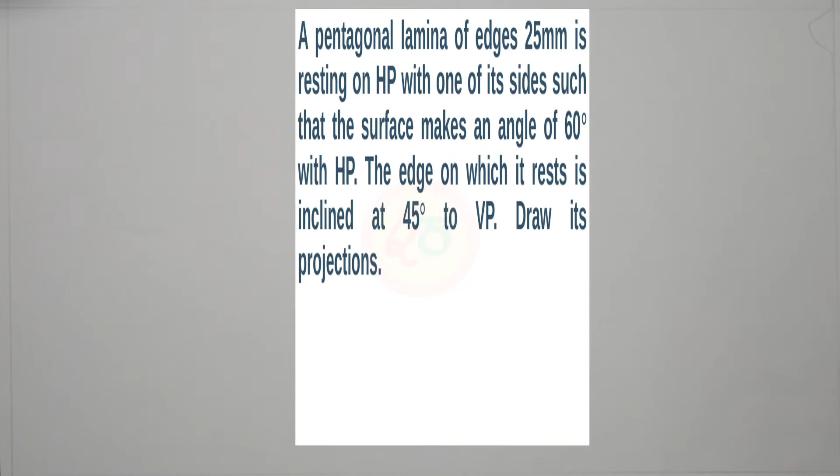Henceforth, when we take up a pentagon or a hexagon, whenever we mention it as a regular pentagon or a regular hexagon or just as a pentagon by giving only one dimension, it is assumed that the rest of the edges are also of the same dimension.

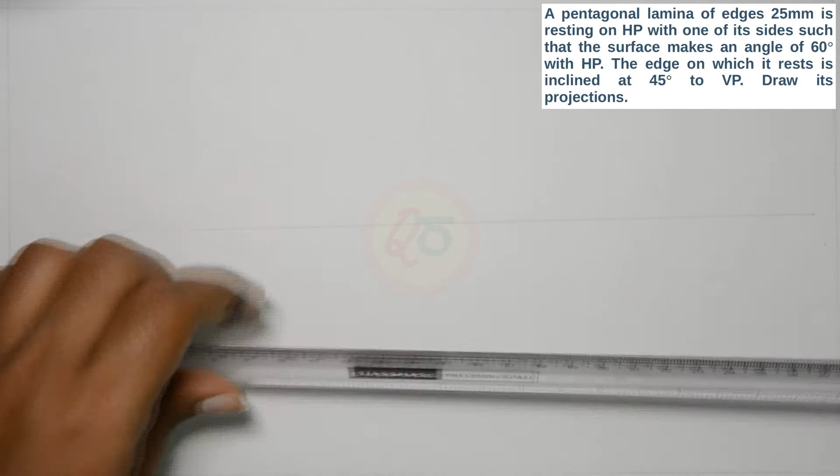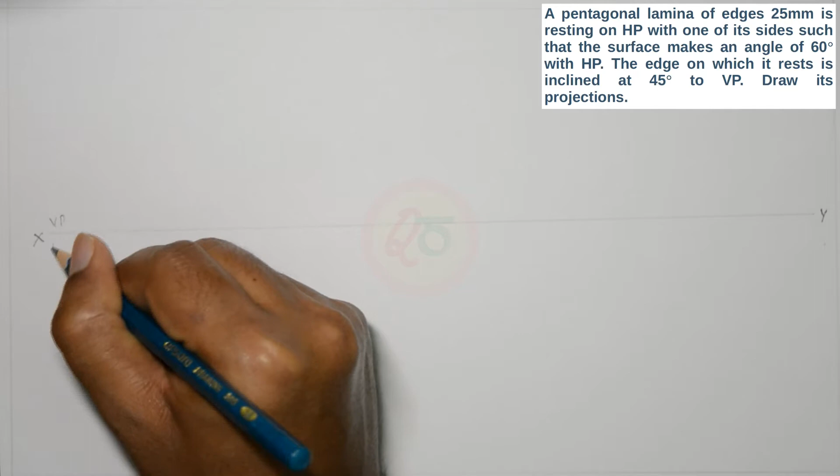Okay, so the very first thing that needs to be done is drawing an XY line. Use your HB pencil, draw an XY line. Okay, name it using a 2B pencil. So X, this end is Y, the space below XY is HP. So the space above is VP.

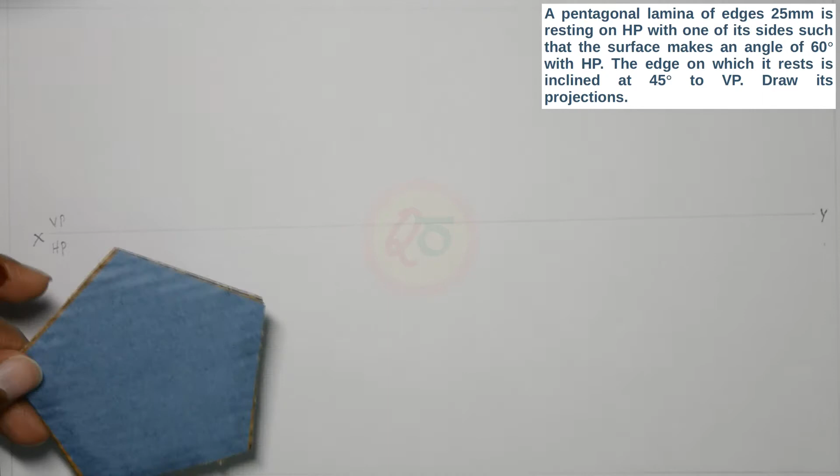Since we are dealing with first angle of projection, the very next thing is we need to look for where the pentagonal lamina rests. The problem statement says that it rests on HP on one of its edges. So the assumed pentagon should lie in such a way that one of the edges should be perpendicular to XY line, thereby meaning that it is perpendicular to the VP plane.

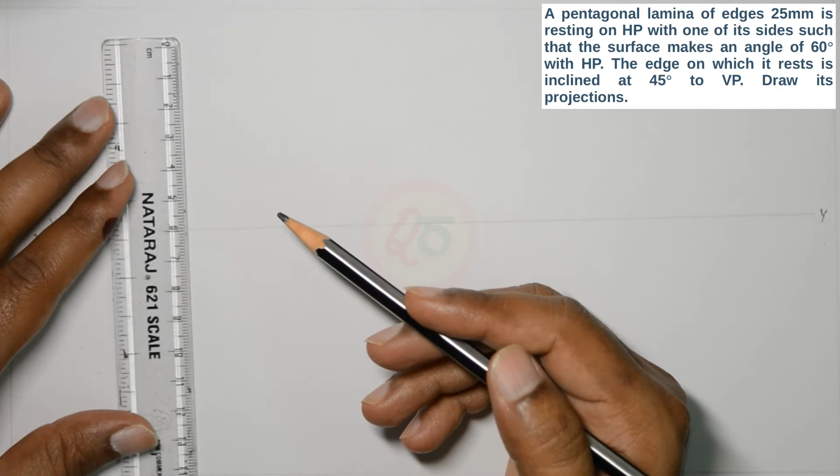And in the first position, we'll make the entire pentagon rest on HP with an edge taken onto the right side. So how do we construct this? There are different methods if you Google them. The simple method that I follow, and which I feel is more convenient, is to initially draw the resting edge, say 1.5 centimeters or 15 mm below the XY line. I'll take 1 centimeter below. Okay, and this should be for the edge length. Edge length is 25 mm.

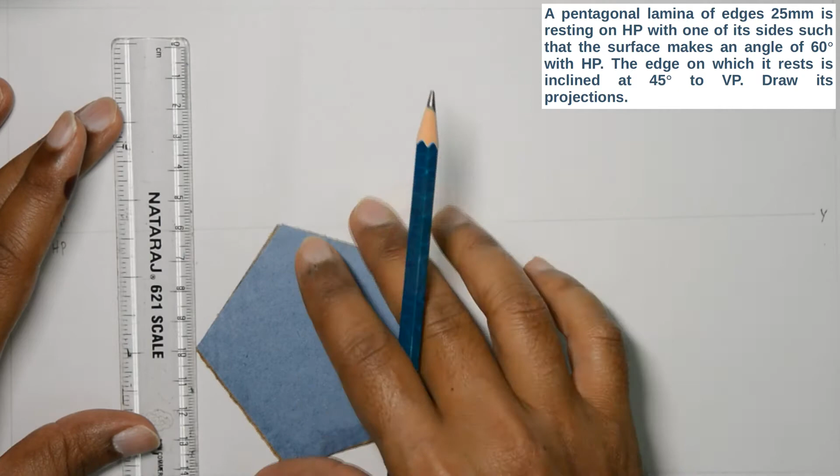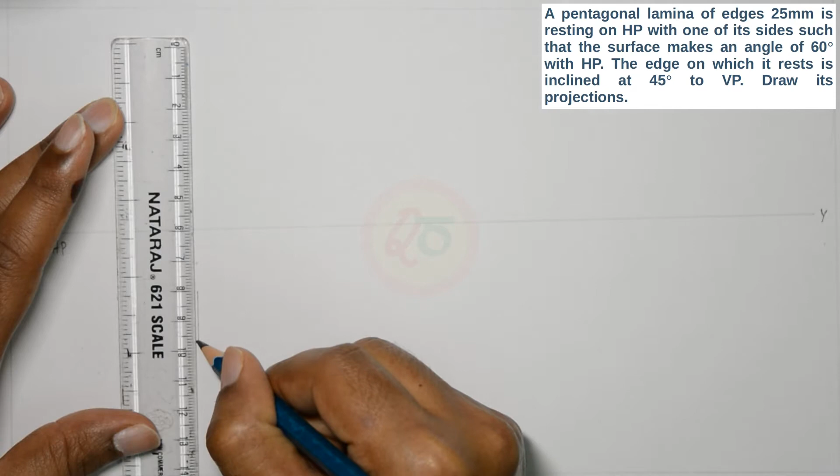Okay, so 25 mm line, you can use your 2B pencil directly, but see, if I draw from 10 mm from XY line, if you consider this as the resting edge, the other corner is going to reach the XY line. So the best way is, I would suggest that you start say 1.5 or 2 centimeters below the XY line. So I go with 2 centimeters. So from 2 centimeters below the XY line, 25 mm, let me draw the edge of the pentagon.

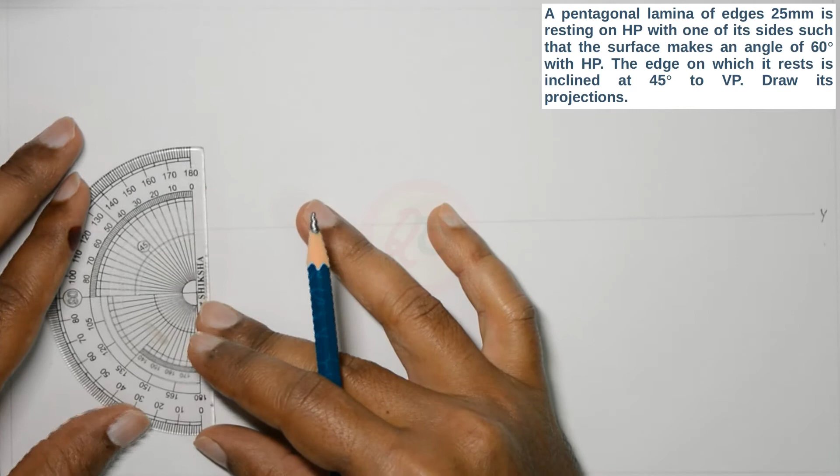Okay, so once you have drawn this, if you consider this to be the resting edge, this angle is 108 degrees, or the other angle is 72 degrees. So this is the general angle for a regular pentagon. So what next is, use your protractor and mark 108 degrees or 72 degrees from the other side on either ends. So from this point, I'm going to measure the angle 72 degrees in this direction, let's say 72.

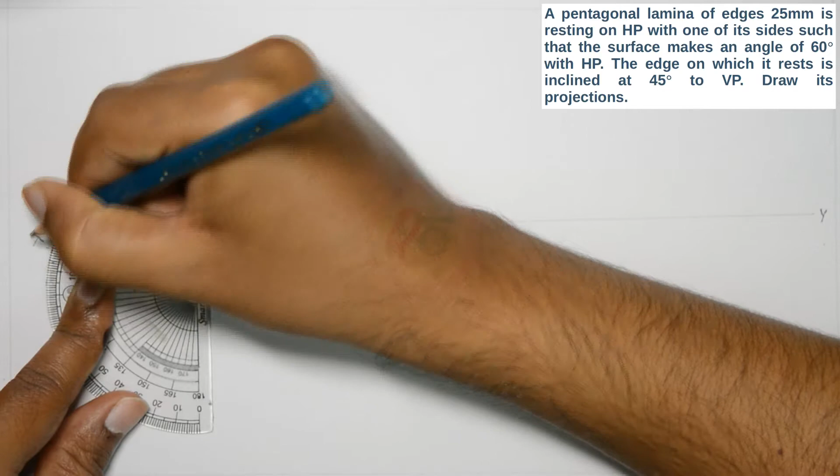Similarly, from the other end, let us mark 72, 72. It's right here. Okay. Once you have marked those 72 degrees with your 2H pencil, connect the 72-degree marking with a very faint line on both ends.

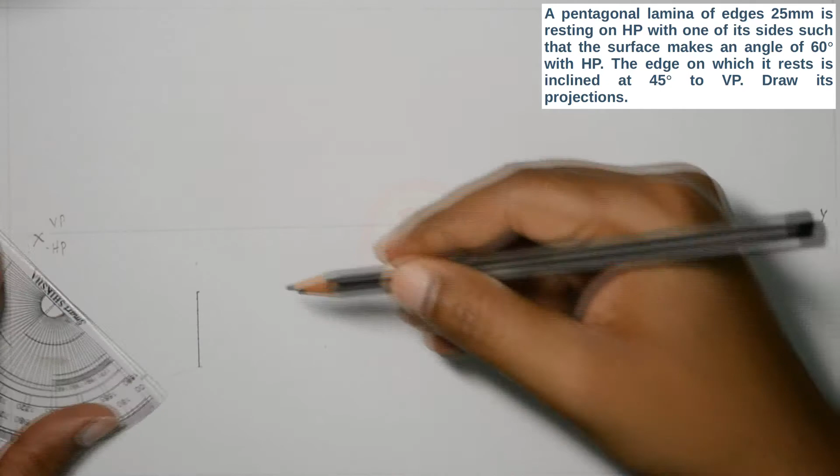Now, using your compass, this is 25 mm, right? All the sides of the pentagon are of 25 mm. We are considering a regular pentagon. Measure 25 mm. Cut an arc on the 72-degree angular line that you have drawn from both the corners of the edge.

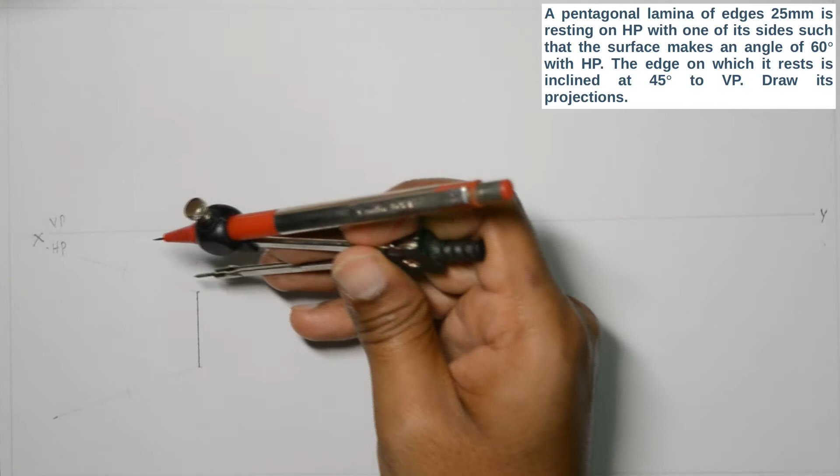And once you have done this, from the intersection point of the arc and the 72-degree line, draw an arc somewhere close to the middle point of the edge that was earlier drawn. So if I draw a line from the midpoint, it should somewhere be on the arc. Similarly, from the other intersection point also cut an arc. Okay, so the intersection point will give you the 5th corner.

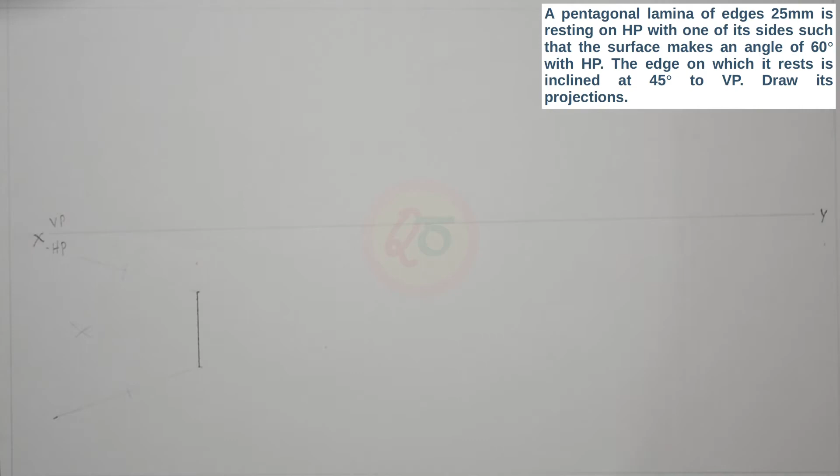Now with a 2B pencil, connect these corners. Okay, similarly from this corner to the last corner that we created, from here and finally, okay.

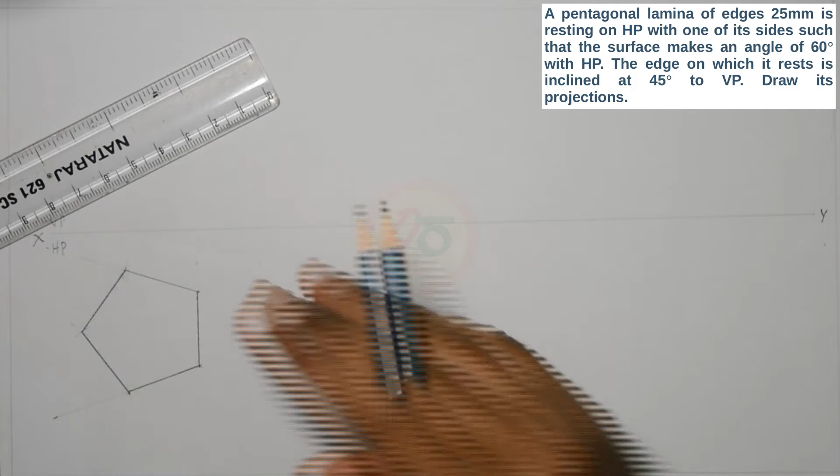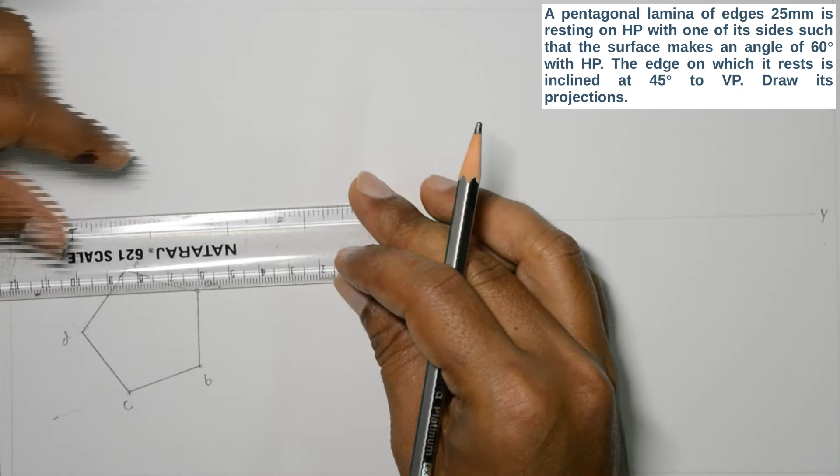Now how do you name this? Naming will follow the same procedure, where this is A, B, C, D and E. Okay. Now with a 2H pencil, dimension the edge. Any edge you can use to represent the dimensions.

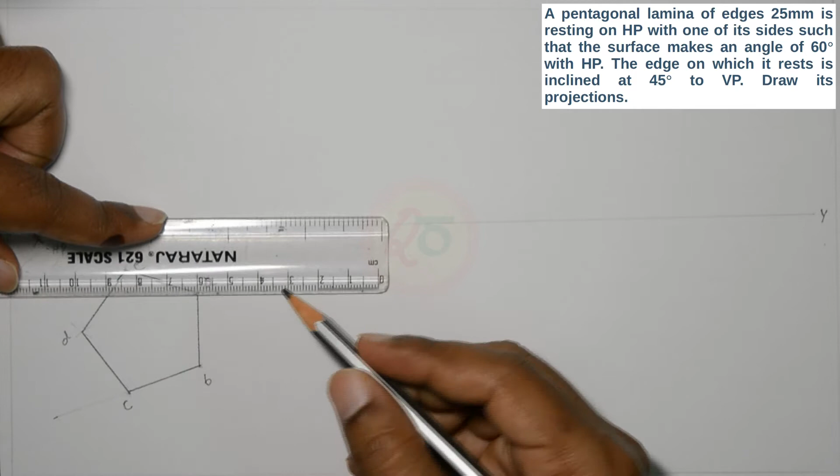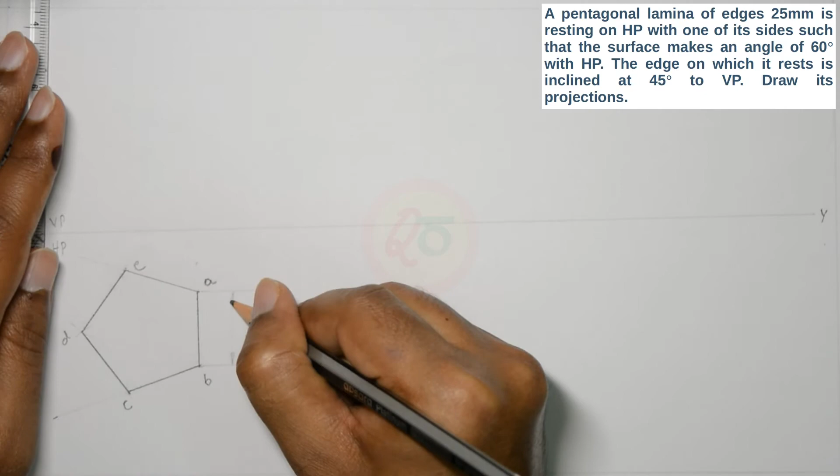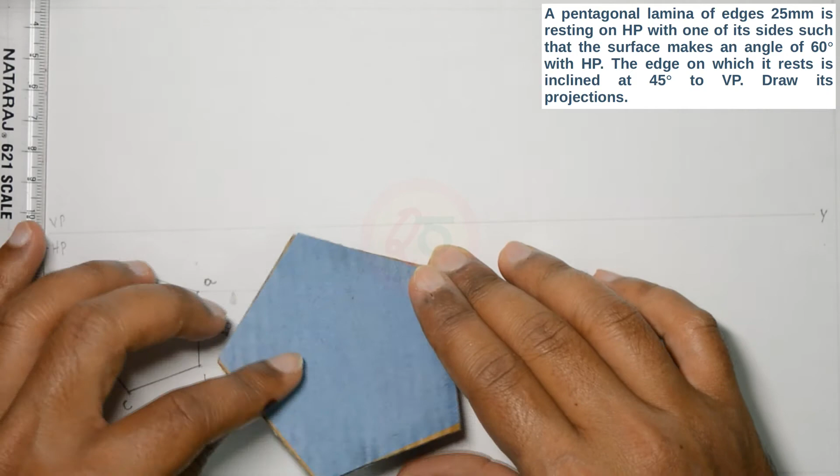Filled arrow marks. So this is 25. Now, since it is entirely resting on HP, when you see it in the front view and project it onto the VP, it will be seen as a single line. So take the projections from all the points.

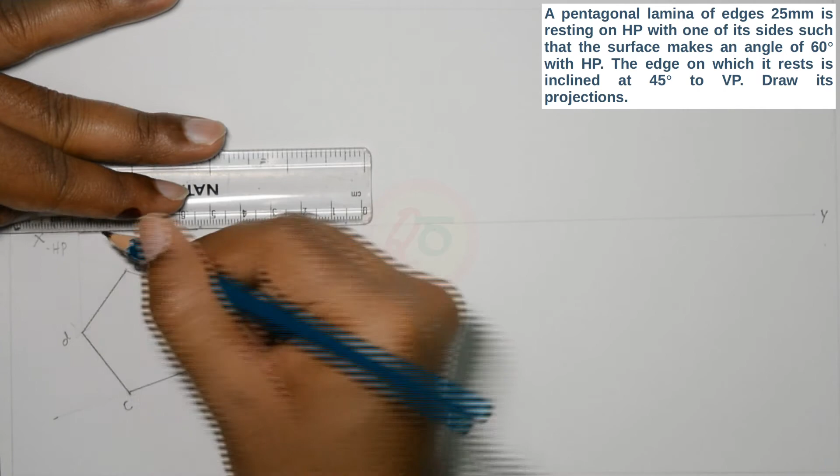See, one more thing, C and E will lie on the same line, okay? A and B will also lie on the same projection line. So darken the segment on the XY line from the extreme projection lines. Between the extreme projection lines, the XY line needs to be darkened. Name them.

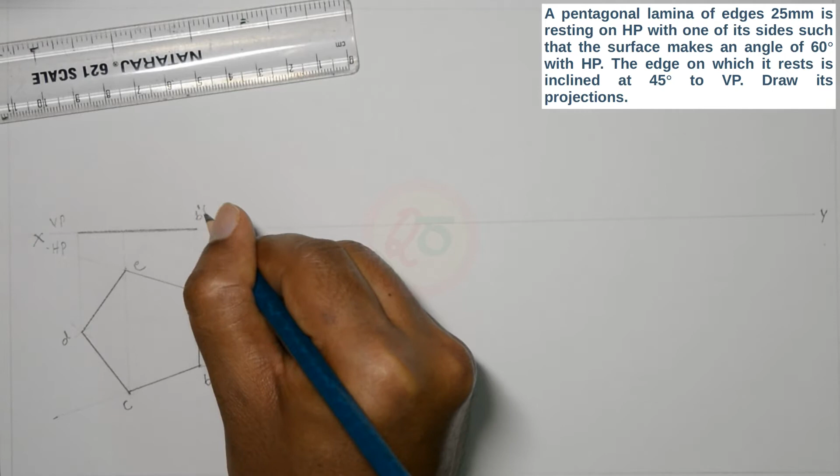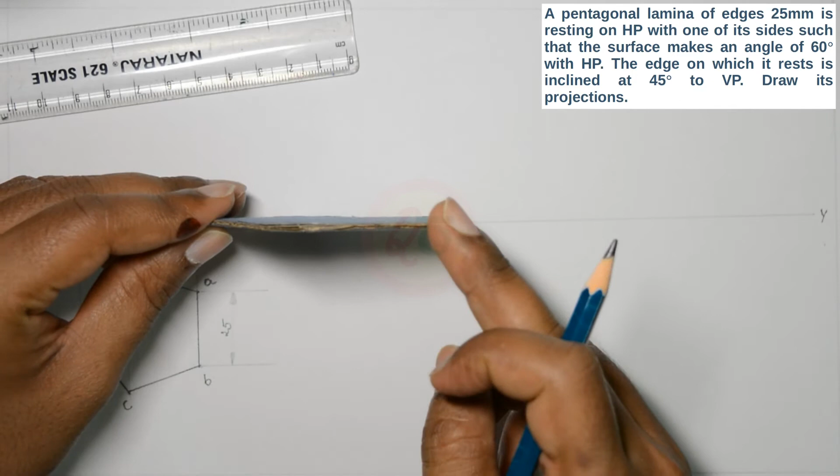So B is visible, so B dash without brackets, A dash with brackets. C dash is visible, so without brackets. E dash is not visible. So if you view it in this direction, B is visible but A is not visible. Similarly, C is visible but E is not visible. So this is D dash. Okay.

Now the next condition is we need to look for the inclination with respect to the resting plane. So the inclination with respect to resting plane is it makes an angle of 60 degrees with HP. So this pentagon, which is like this in the first position, the edge will rest on HP and the entire lamina is going to lift from the opposite corner to the resting edge, and by lifting the entire lamina, the angle to the HP plane, this angle which gets created, will be equal to 60 degrees.

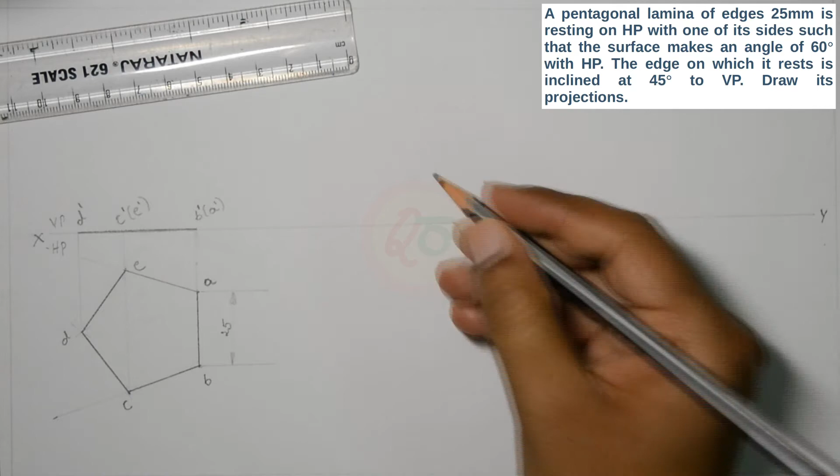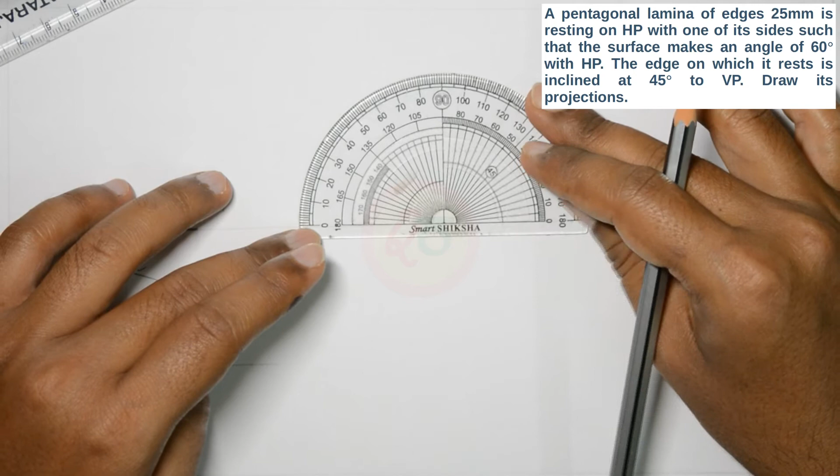So in order to achieve that, select a random point, and again when the entire lamina lifts like this, the projected length, see, suppose this is the front view, assuming this is an HP plane, when a 60 degree angle is obtained, the projected length of the lamina will not change, it will be the same. So hence in the front view, we are going to mark 60 degrees first using a random point. Sufficiently away from first position. Okay, mark 60 degrees.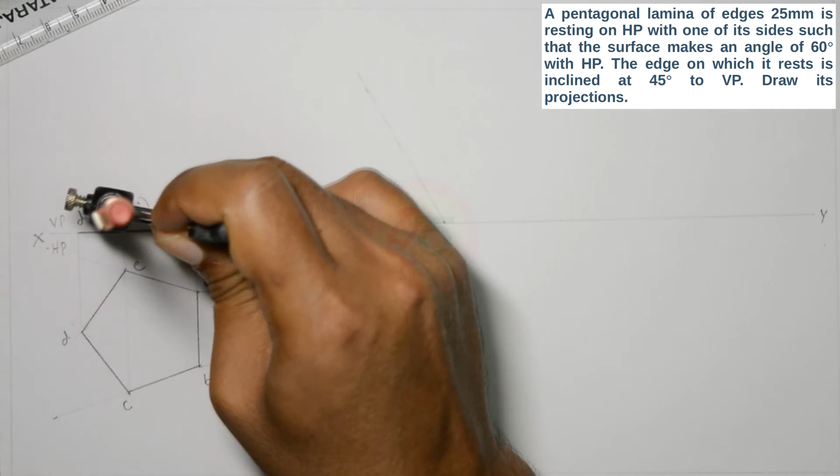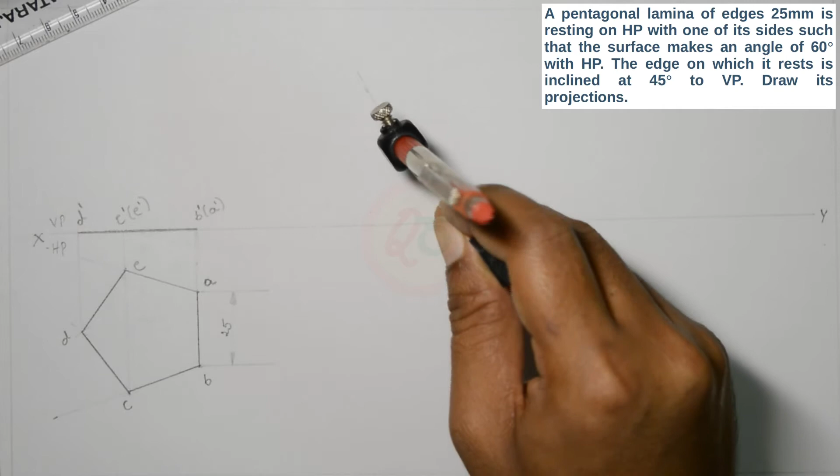Connect the marking on the XY line with the 60 degree marking with a 2H pencil. Now measure the distance from B dash, A dash to D dash. This resting point on the XY line will be the resting edge, which is B dash, A dash. Cut an arc to find an intersection point with the 60 degree line, and the intersection point will be D dash. So this is D dash. The one at the bottom is B dash, A dash.

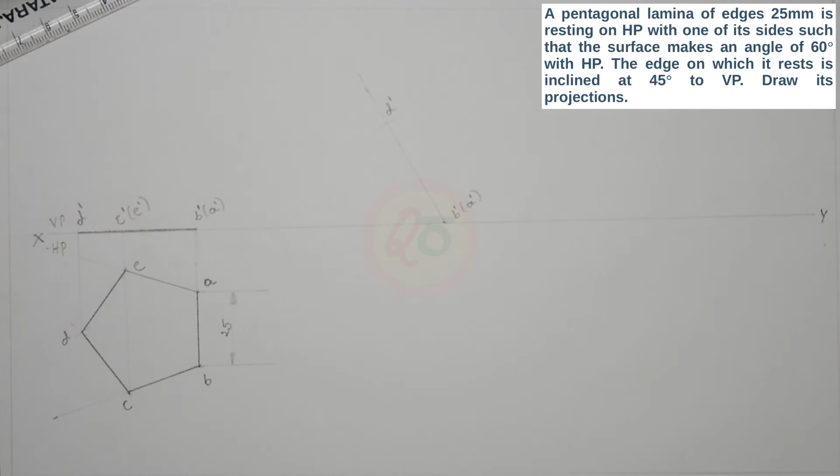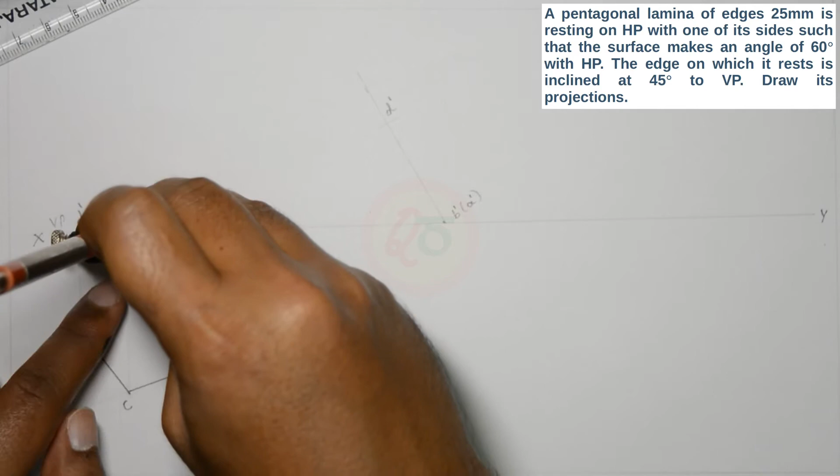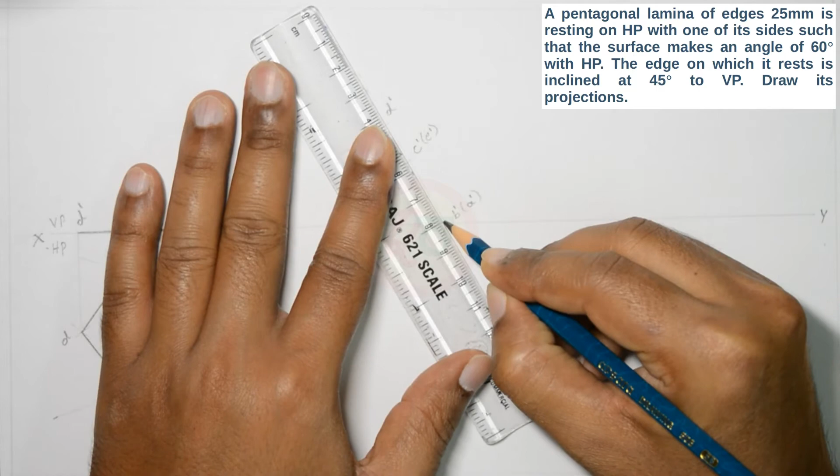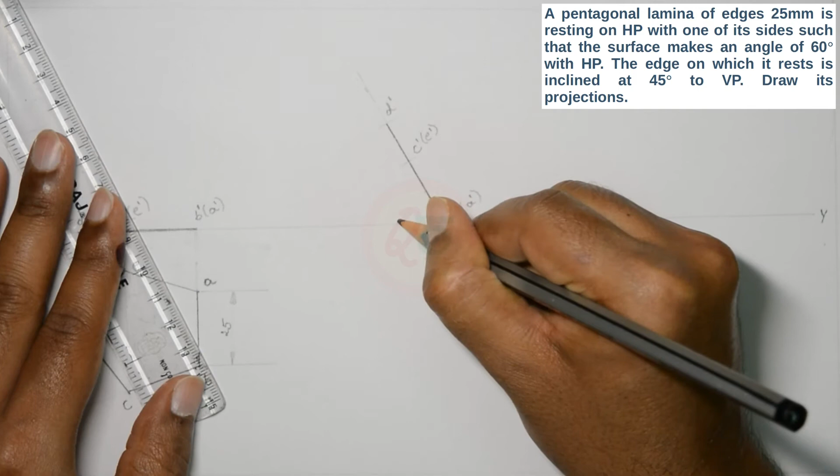Okay. Now we need to obtain the position of C dash, E dash as well. So from B dash, A dash, measure C dash, E dash from the first position. Cut one more arc on the same 60 degree angular line that you had created, and the intersection point will be C dash in brackets E dash. Okay. Now darken the line using a 2B pencil from D dash to B dash, A dash. Okay. Mark the angle, which is 60 degrees. Okay. So this is 60 degrees.

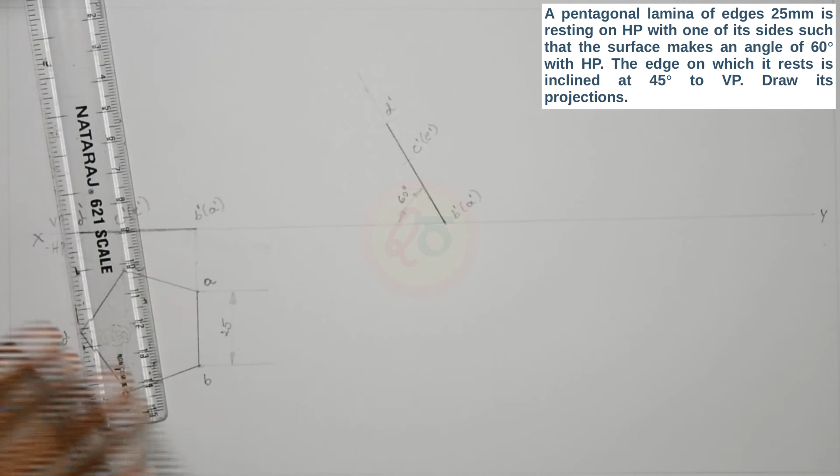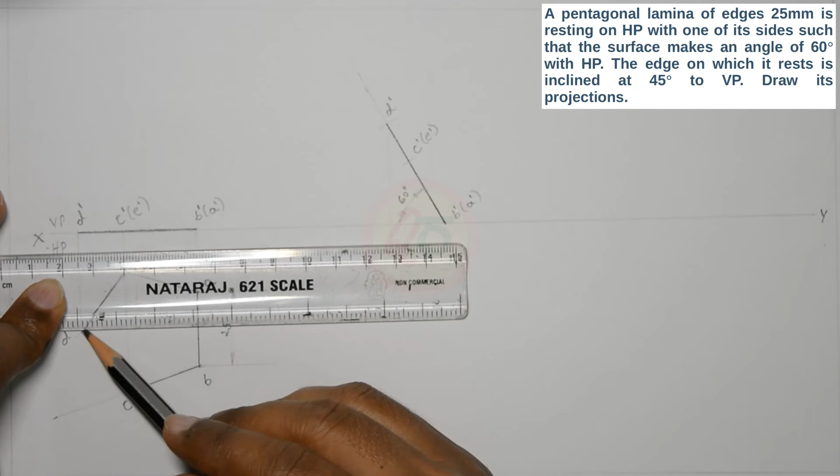Now we need to obtain the top view. So in order to obtain the top view, which is again a pentagon, but the length has been shortened on all the 4 edges. Apart from the resting edge, the other 4 edges are shortened in their length. So in order to obtain that, draw projection lines from D dash with a 2H pencil till you obtain the projection line from D in the first position. So this is D. From the first position, obtain the projection line. The intersection of both these projection lines will give us the position D in the second position.

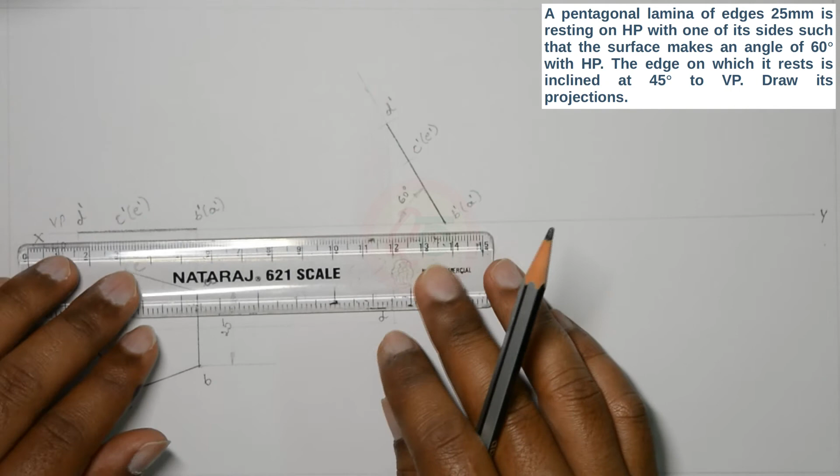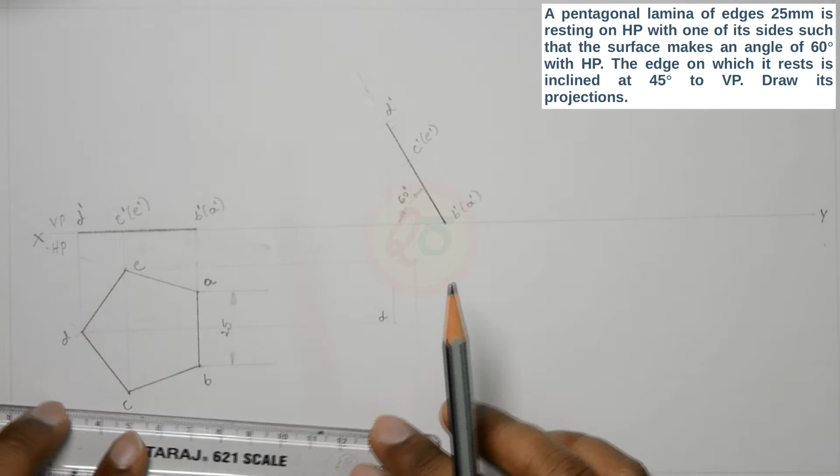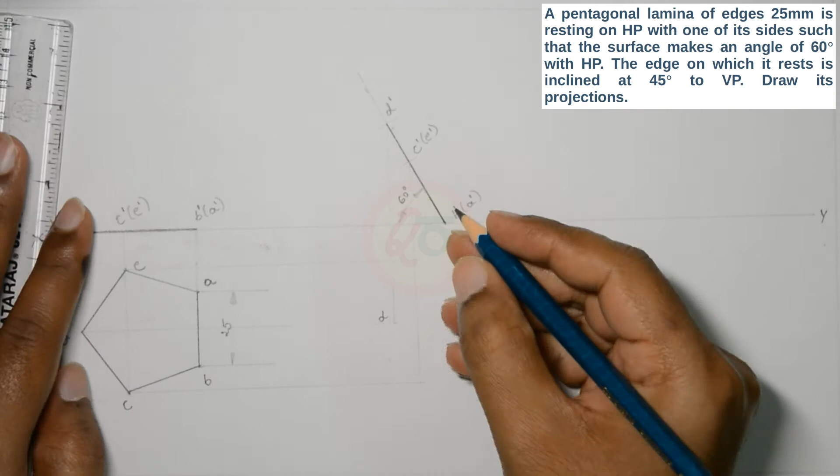Similarly, from E in the first position, obtain a projection line, and from C dash E dash obtain a projection line. Similarly, from C, draw a projection line, and the intersection of these projection lines will provide us the points E in the second position and C in the second position.

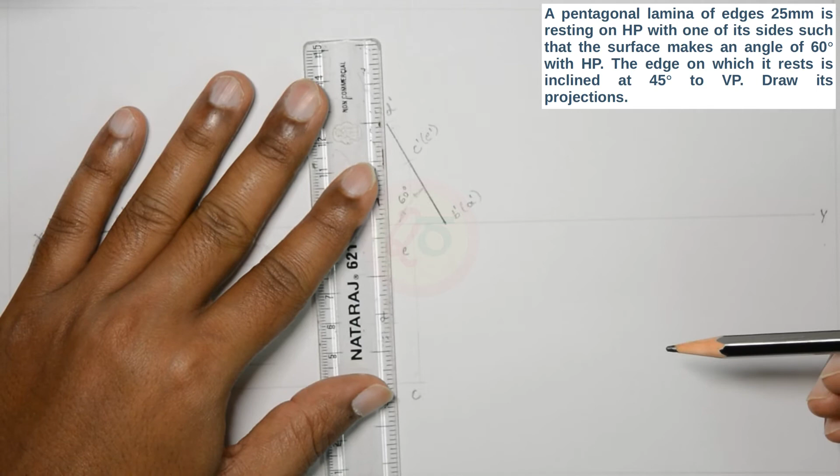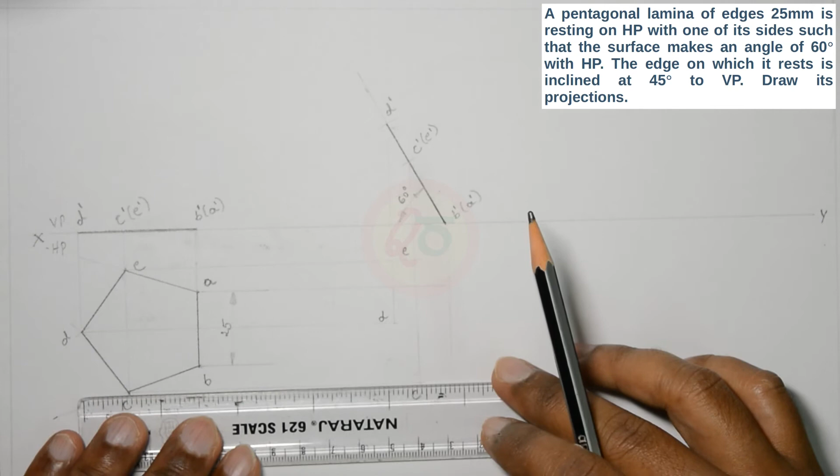Similarly, draw projections from B dash A dash in the second position till projection lines from A and B in the first position. A and B.

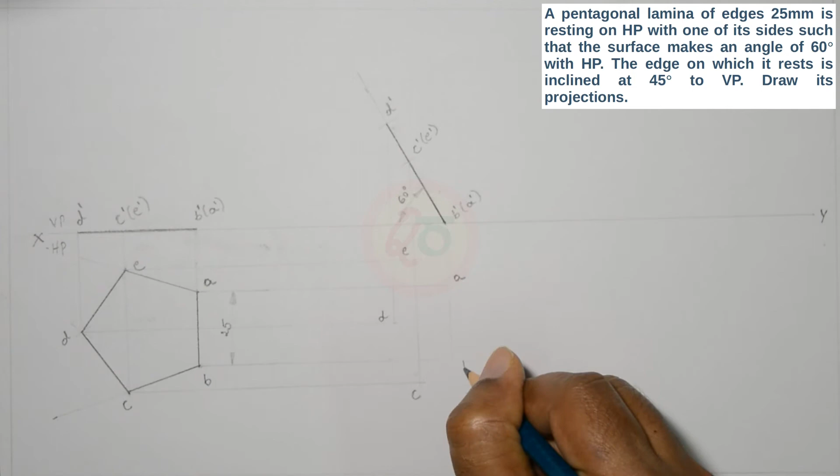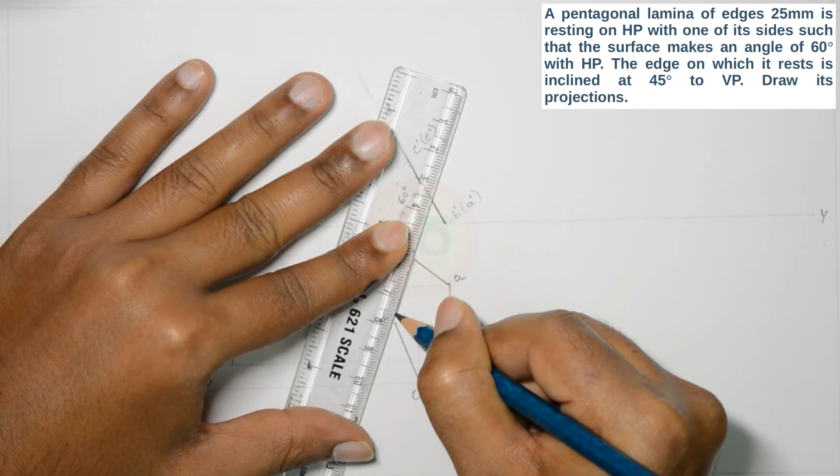The intersection points will be A and B in the second position. A, B. Now join A, B, C, D, E to obtain the pentagon. So from A to E, A to B, from B to C, C to D, D to E. Okay. So this is the projected view of the pentagon in the second position.

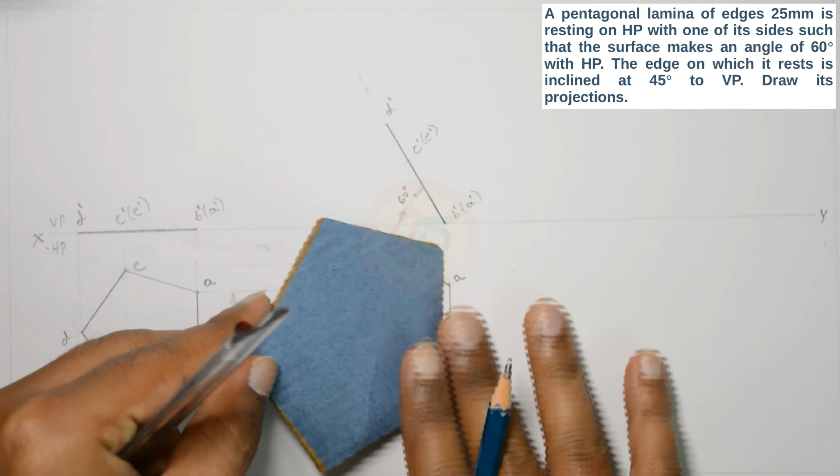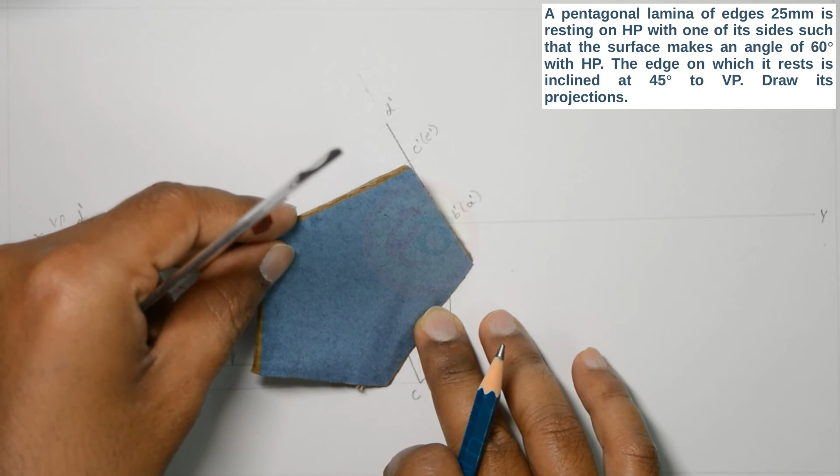The third position, it says the resting edge makes an angle of 45 degrees to VP or vertical plane. So we will be rotating this in such a way. So now it is like this. Okay. So this is the resting edge. Now we need to either rotate like this to give 45 degrees, but doing so, there are chances of the corners exceeding the XY limits. So we'll rotate it anti-clockwise 45 degrees.

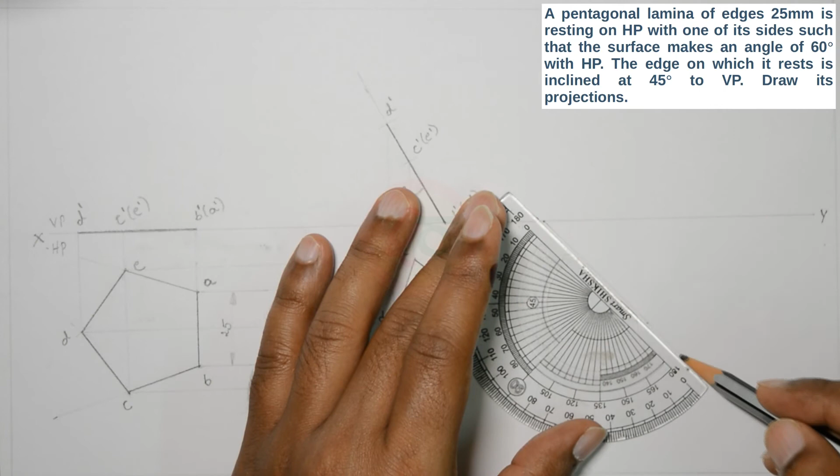So select a random point, mark 45 degrees, with a 2H pencil, connect the 45 degree marking that has been just created. Okay. Now on this 45 degree line that has been marked, so let me dimension 45 degrees. On this 45 degree line, I need to recreate the pentagon in the second condition top view.

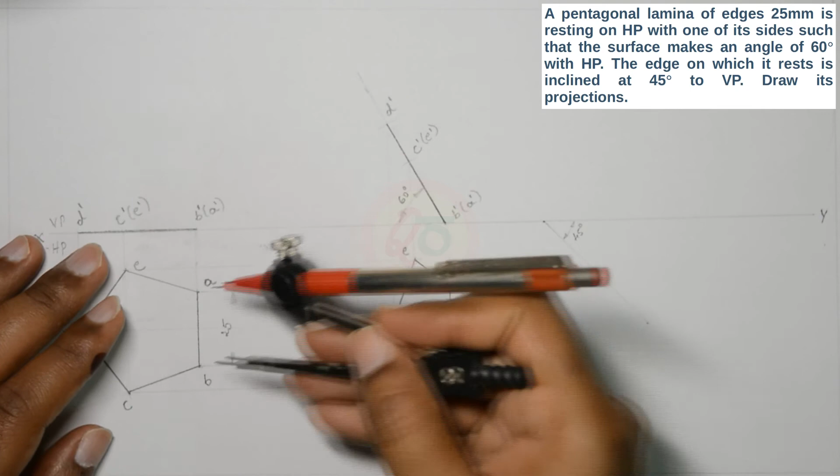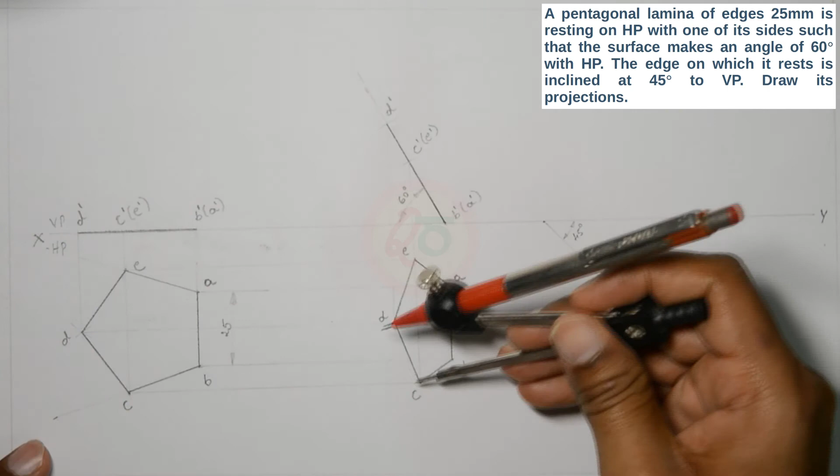So what I'll do is I'll measure AB, which again should be 25 mm. Select a random point on the 45 degree line, cut an arc. Okay, so the compass end will be A. The intersection of the arc with the 45 degree line will be B. Now recreate the rest of the points, which are C, D and E. So from A till E, measure, cut an arc, from B to E, measure the distance, cut an arc. The intersection of both the arcs will give us the position of E.

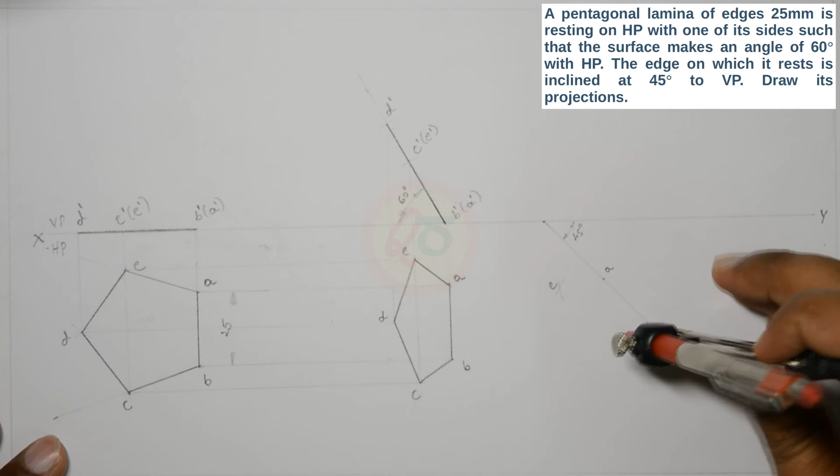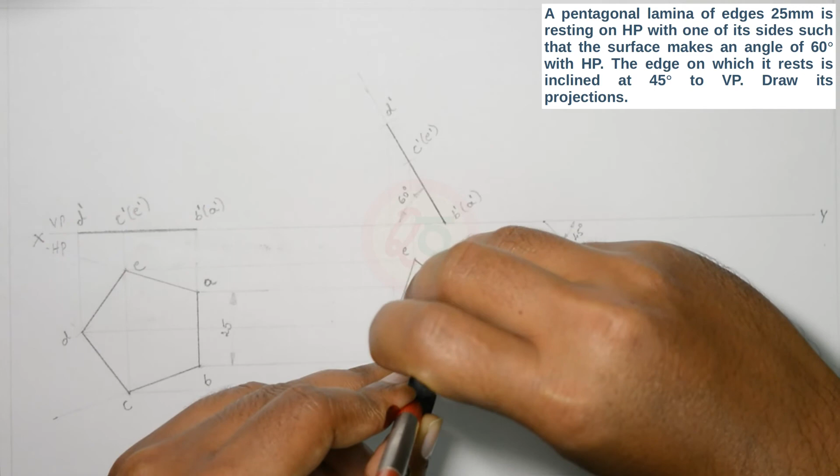Similarly, from A to C, from B to C, measure the distance, cut an arc. Okay. From A till C, measure this distance. From A, cut one more arc. The intersection will be the position of point C.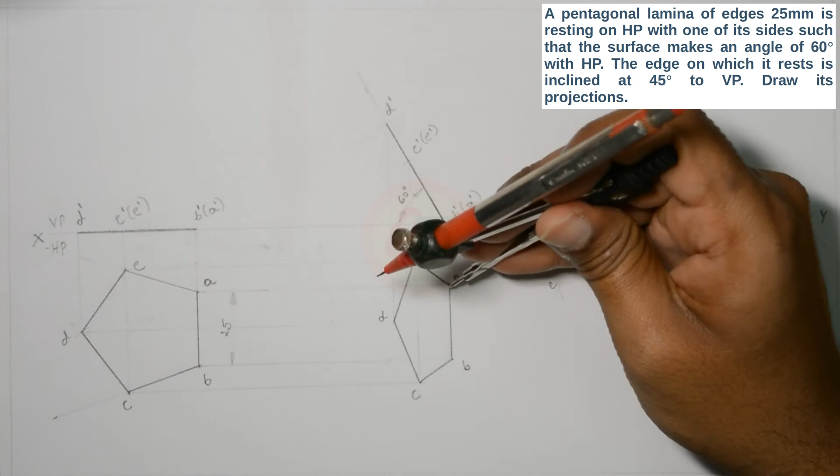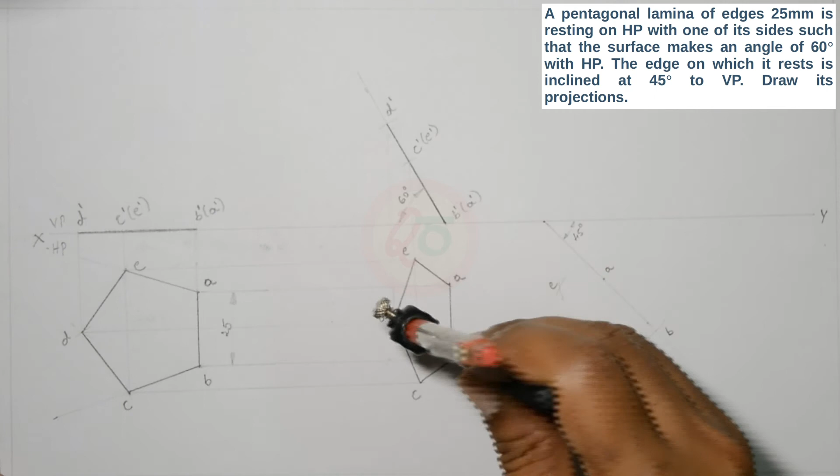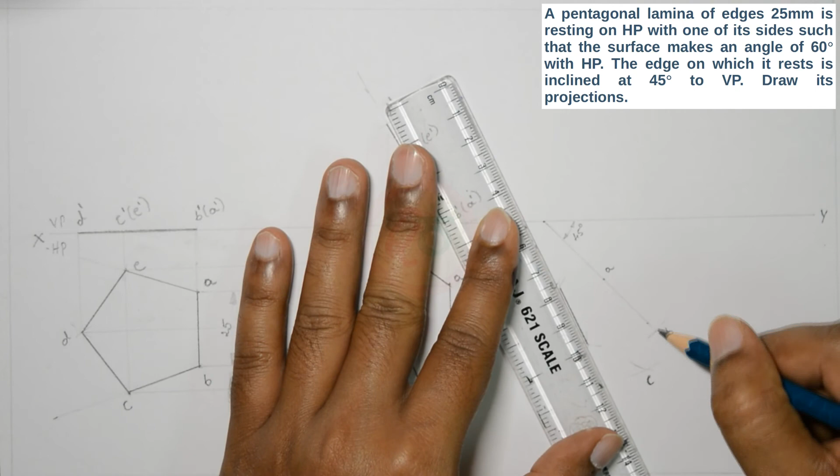Now from A to D, measure the distance. A to D, cut an arc and approximately the position of D. From B till D, measure the distance, cut an arc. From A to D. Okay. So the intersection of the arcs will give us the position of D. Now join D to E, C to D.

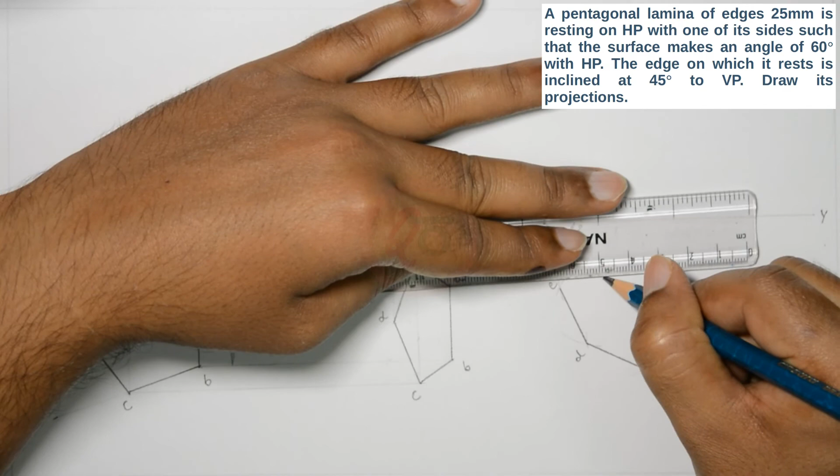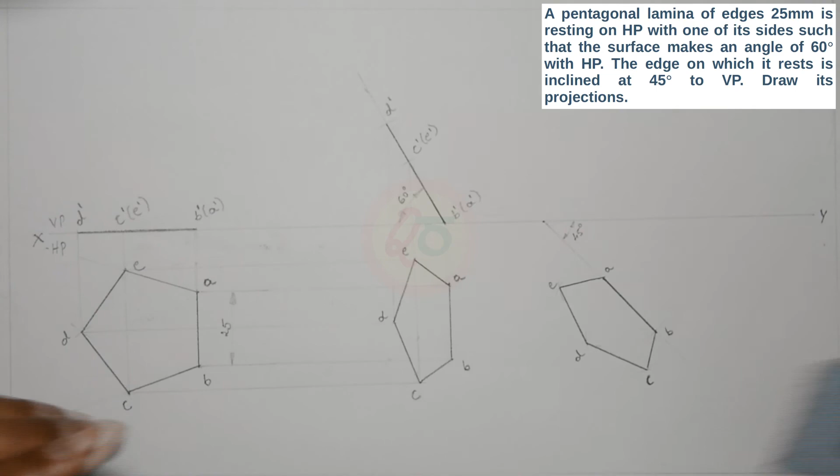We are just recreating the pentagon that was present in the top view of the second position by rotating it by 45 degrees. Okay. Join A to B. Okay. Now in order to obtain the top view, now this is how the first position top view was. Then we gave an inclination, then we have rotated it by 45 degrees. Now we need to draw the front view of this. In order to obtain the front view, draw the projection lines from E of second position till E dash of second position front view. Okay.

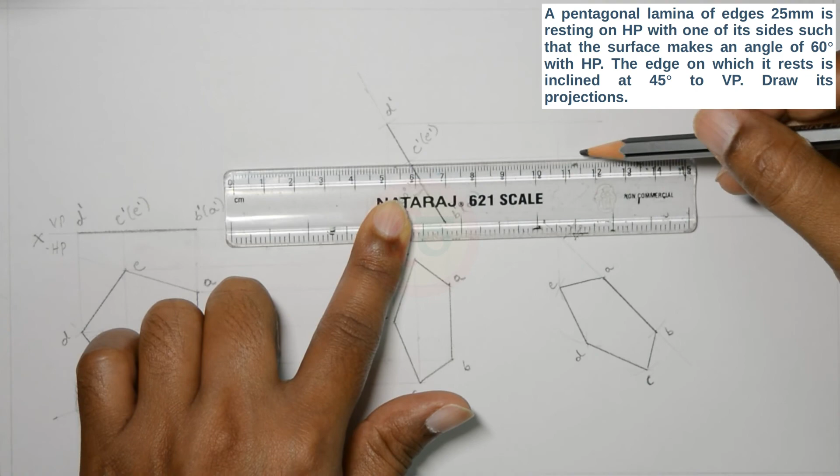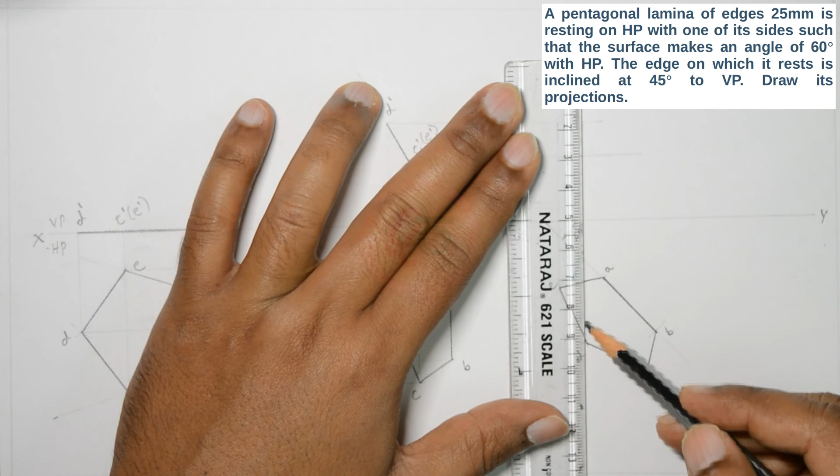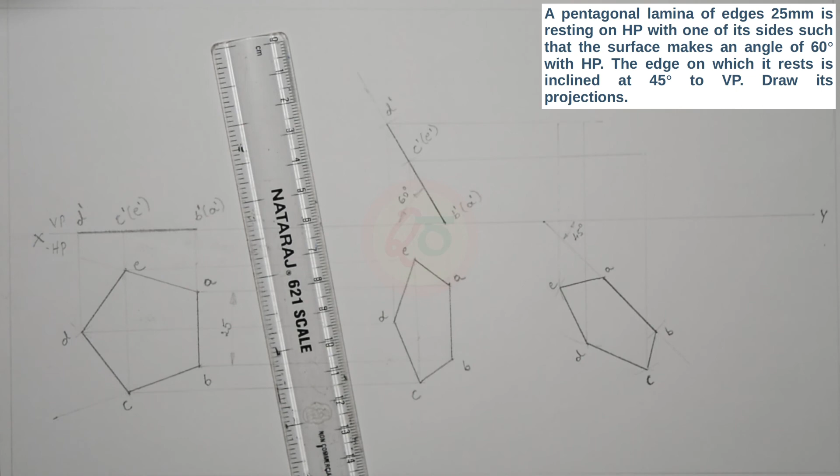So draw the projection lines from D dash, from C dash, E dash. Okay. A and B, they lie on the XY line, so the projection line will be only till XY line. From D dash, okay, this is from D to D dash, from C to C dash. Okay. I'll erase the excess lines that are drawn in order to make the diagram look good. Okay. From A till XY line, from B till XY line.

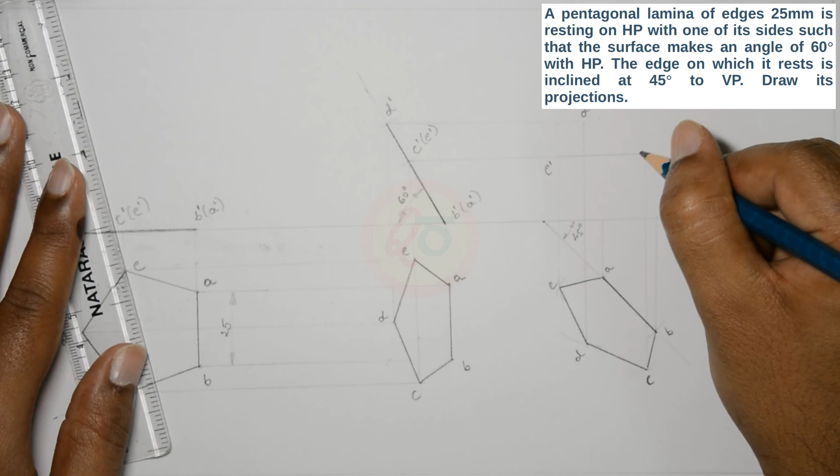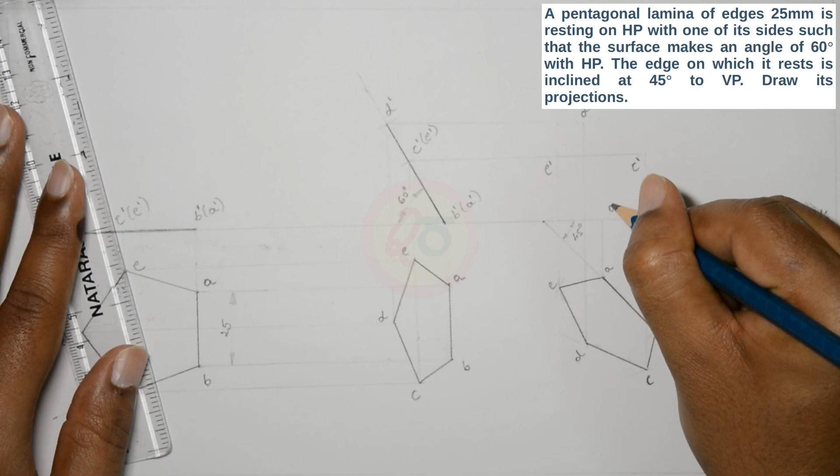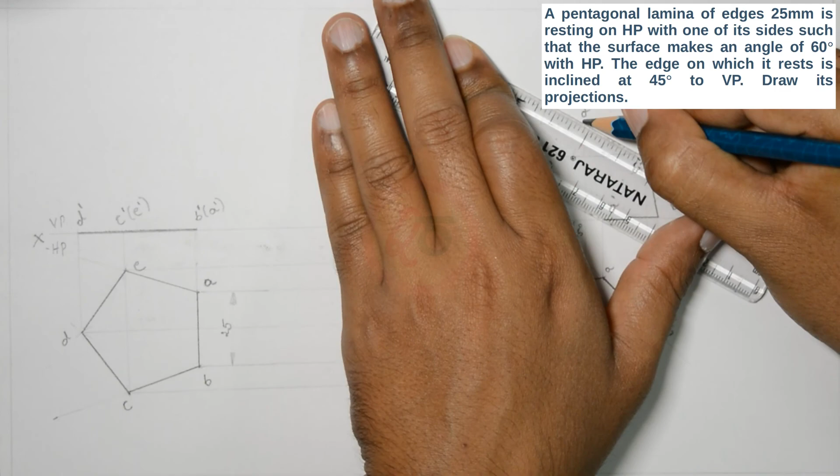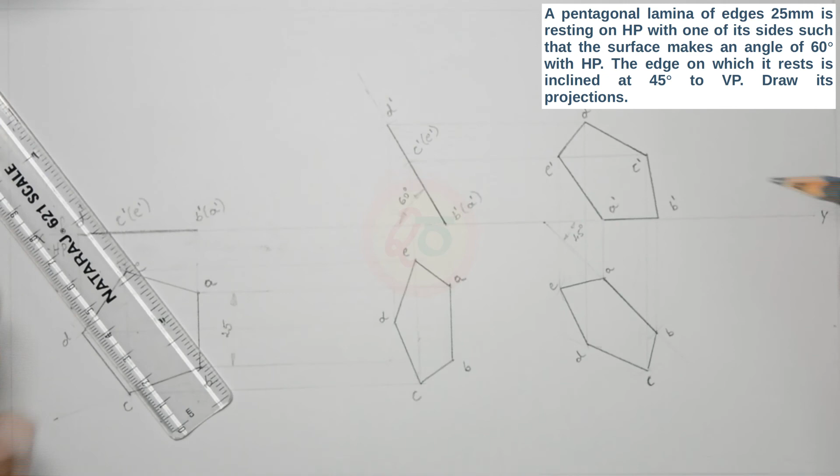Okay. Naming, this is D dash, this is E dash, this is C dash, this will be B dash A dash. Join all the points A dash to B dash with a 2B pencil, B dash to C dash, from C dash to D dash, okay. From D dash to E dash, and from E dash to A dash. Okay, this completes the solution for the given problem statement.